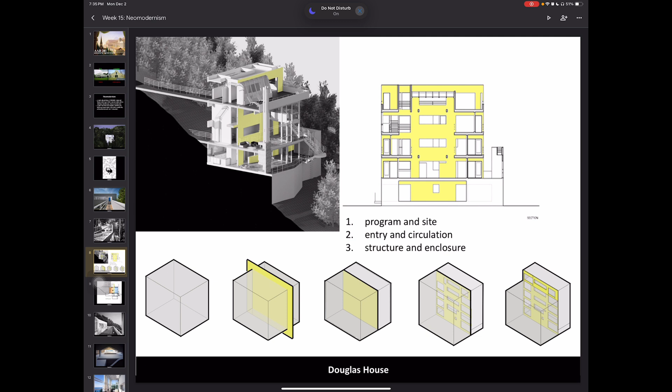So when you look at it in section, this is the way it's articulated, right? You have the private zone in orange looking to the hill, so you have nature as a sense of enclosure on the backside. Then on top you have a skylight, which creates a light well throughout the entirety of the home, because it's a very tall and deep home. Usually you have sunlight reaching all the way to the bottom. And lastly, we have our public zone, blue, facing the coast.

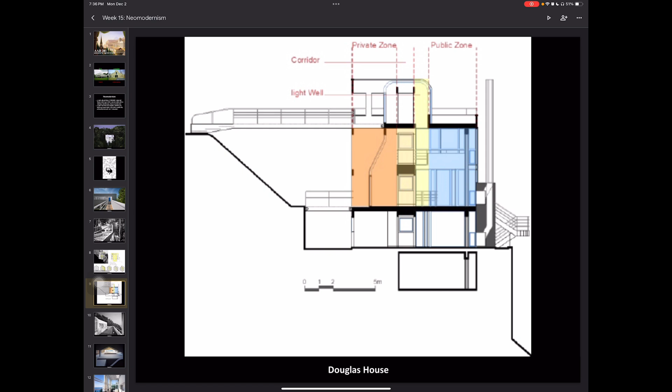Overall very white. He does use a lot of panels on this, and then eventually in his public architecture he uses these panels of metal, which align with everything. So if you go to the Getty Center in LA, which I highly recommend, especially over winter break, it's really nice, you'll notice that every single line aligns to something else. You won't find anything that doesn't align to the rest of the building. It's really incredible, you try to find something and you just can't.

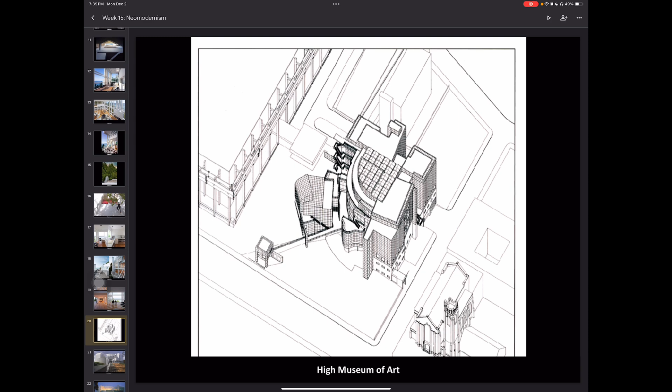So in this one, we can see the element of circulation is the most prominent part. You enter right here onto the second floor, and then you can go into the basement on this level, but really you're going to enter on this upper floor. Notice that he does frame that for us, which is a very classic Richard Meier type of language.

He likes to frame and create portals, so he directs our views where he wants them. If you go out to the Getty, you'll notice he has these frames, and if you go to the rooftop, he kind of frames this is LA, this is the ocean, this is some other landmark, so he pays attention to the site to frame it for us. And the entrance, he does frame it. I forget exactly the thought process, but notice that it's not just straight out onto the street or balcony, but it is kind of at an angle.

Basically, the museum is a composition of different squares. Some people say it's 5, other people say it's 6. So 1, 2, 3, 4, 5, and then the 6th one is over here, which is the auditorium. The auditorium is separated from the rest of the museum so that you can use it independently, mark it as its own thing, and separate it acoustically from the rest of the museum. So functionally, it does work to separate.

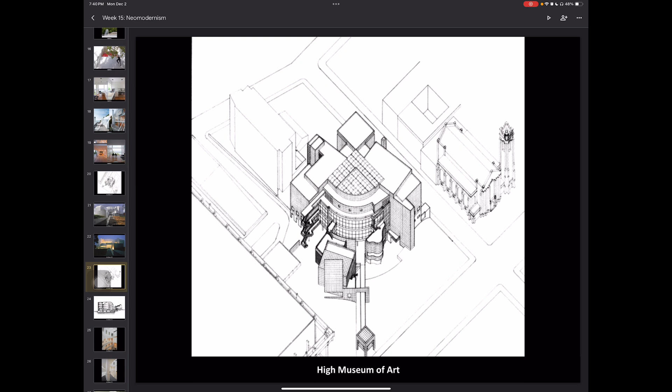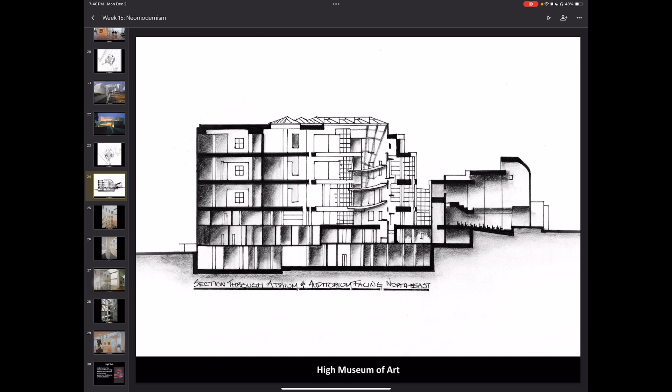Here's what it looks like in section. That big round rotunda section is a huge skylight, just like the Douglas house, and all of that you see inside is a series of ramps. The circulation, you'll notice, he marks with the same style of railing used in the Douglas house, except now it doesn't have that same ship-like look.

It's simply a nice clean railing. So it shows us just how meticulous the Douglas house was in comparison. Yes, it does have that precedent, it's not super obvious, but when you look at it in comparison to this, you can begin to see it was a little bit different, inspired by a different concept.

So you basically meander throughout this ramp, you go up onto one level, and then it takes you back up and takes you to a different level. I'm going to show you a walkthrough so you get a couple of different glimpses of what the museum does.

If we go into the museum, he very cleverly uses skylights, glass blocks, and different materials to allow the maximum amount of daylight with no direct sun rays. You never want direct sun in the museum because it ruins the artwork. You always want diffused daylight.

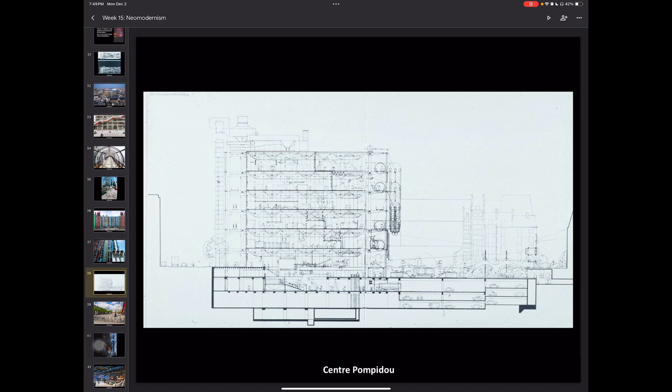By using half of it, they did have to go a little bit more vertical. Now, because this is so large, you are going to have a lot of exhaust and fumes. Since the parking runs underneath all of this, all of those white pieces are the ones ventilating that underground space. Back in this image, that is what these are, ventilating it from the other side of the site.

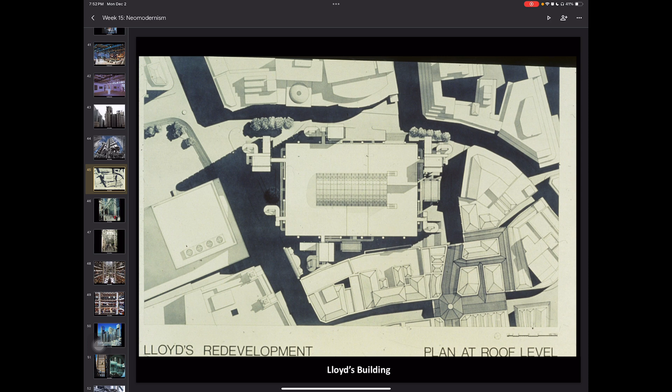From the top, this is the entirety of the building, and notice the circulation is taken out so that it makes those really interesting pieces as we look at it in front of the facade. They could have easily put the circulation inside that big square and left it as a clean outdoor facade, but instead they extract it so you can see how the circulation works in the building, and they do the exact same thing with the elevators. As you enter the building, very similar to the Pompidou Center, you have this huge glass canopy that kind of invites you in.

It also creates a sense of scale. One of the big problems with a lot of early skyscrapers is that they don't give you a canopy like this, which is why, if you've seen any film or been to New York, you'll notice the big residential towers have this red tube with a carpet coming out to the street. That gives you a sense of scale that's more comfortable than straight up entering a 108-floor building all the way up and down.

So in this building, it is integrated because they recognized they were going to have that problem. It's a little bit more friendly and not as imposing on you.

There's also a certain problem with the sense of looming. This happens especially with people that have conditions like schizophrenia and Alzheimer's. If your building is too vertical, it can almost create a sense of it falling over you, and it typically scares people. So you have to create something like this and open it up a bit more so you don't feel as threatened by the largeness of the building as you enter it.

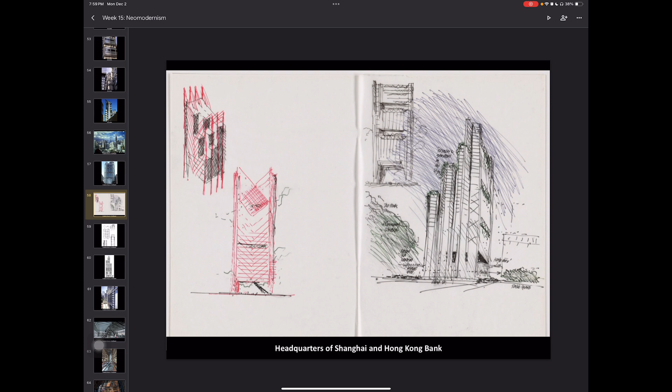So its concept is these four masts on each side, and notice that they have these lines, almost like bridges—these cables that are holding up the building and hoisting it on either side. The trusses and the whole structural system are really meant to just hold up the floors vertically, so that there are these little plates you can slot into place. You're not necessarily holding them up with individual columns at each level—you're holding them up with a larger exoskeleton.

More sections of it. One of the critiques of a lot of these types of buildings is that they have really deep floor plates, and because they try to articulate each floor and repeat this so much, their floor plates do tend to be a little bit lower and not have as much daylight. So that is one of the critiques of this movement.

You can see a little bit more of that skeleton, and it almost begins to have a human-like quality, where it looks like a spine going up and down.

Now, one of the coolest parts of this building is that it is completely open on the ground floor. So this is all you have on the ground—you might have a little bit of an elevator over there for accessibility, but you really just have these two big escalators bringing you up into this glass canopy, which is highly unusual for a skyscraper. Usually you have a whole lobby that comes down with a stair and a really nice entryway, but in this case, you're simply brought up by an escalator.

So it's another kind of manifestation of the high tech—you're brought up by a machine into the building. As you stand in this atrium, you can look back down on that ground level because it's all made of glass, and you can see people move throughout it every single day. Here is that escalator coming up right through the glass.

If you're wondering about thermal control, basically you have an air curtain where you see this here. You know when you walk into Walmart and you feel the air coming down on you as you open the sliding doors—that's basically the same thing that happens right here. That way, the conditioned air doesn't leave the place as quickly.

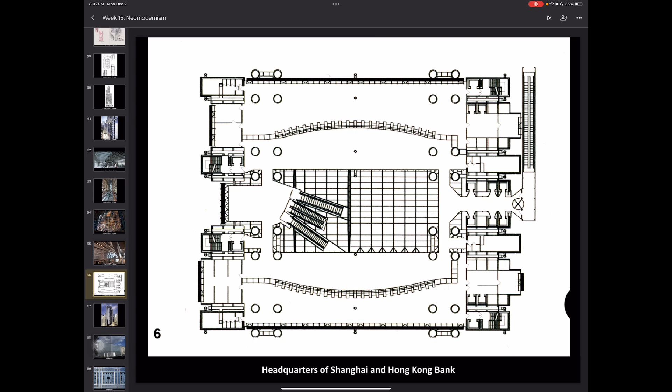The issue with them is because they are so tiny and meticulous, they often have issues with some of them just staying permanently closed or open, so they require a lot of maintenance.

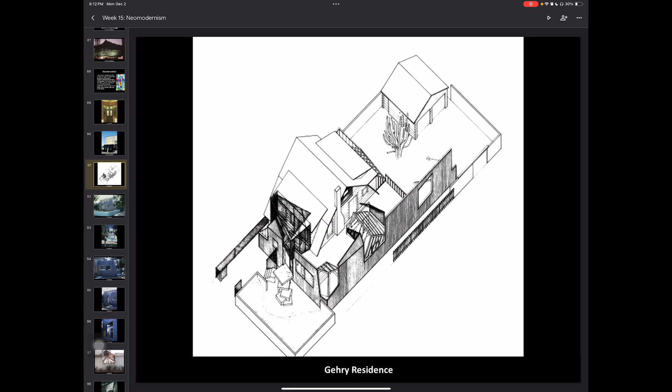What we can see is chain link fence at the top, a little bit of corrugated metal along the bottom. His door is just a sheet of plywood. It's highly unfinished, not really to the taste of everyone. Personally, I don't like it, at least how it looks on the outside, but the ideas are there.

He's basically saying, what if we break away from the idea of what architecture has to be? We use materials that are meant to look unfinished, put them at really interesting angles, and create a shell where you don't even know—is that the interior, is that the exterior, is that a veranda, is that a kitchen.

This is actually his kitchen, which he literally pushed out of his house. He created it into this glass box, and the whole concept behind this was, you have a chain link house, a metal house, and a plywood house, and you drop them on top of this existing house—they're going to fall apart, which is why they kind of look like cubes, but then the corners are cut off, sliced at their angles.

This is the entry. Rather than having normal steps, he creates this really interesting cube composition. And then there's his ugly door.

Here's an example of where that skin leads to an outdoor space, but in his kitchen, it leads to an indoor space, which you can see right there. So what if we create a cube as a ceiling rather than just leaving it flat?

He's not so much playing with the idea of site here—this is simply like a side project he has. As he's acting as an architect and trying to convince clients to do things like this, he's experimenting in his own home to get his technique effective. So this is what the interior of the kitchen looks like with that cube overhead.

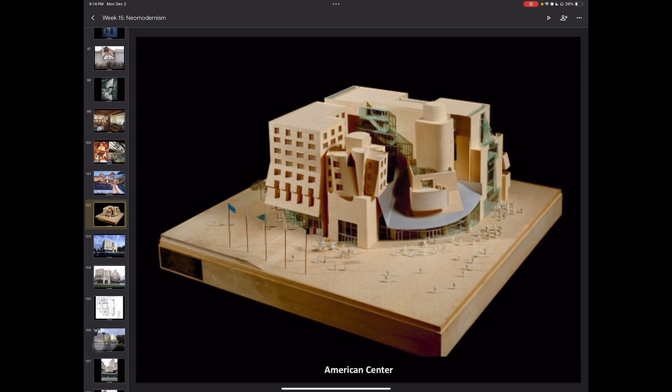All right, so now we're going to look at some of his actual buildings, not his personal projects. As you can see, they still have a little bit of Frank Gehry in them. This is one of his earlier ones.

What he's doing here is allowing this corner on the main street to have a traditional-ish facade with straight up and down French windows. But he's playing with the bottom skirt, allowing it to project a bit without making an exclusion. He's playing with the idea of a traditional alleyway or walkway having a cover over it. Rather than just putting a cover or projection over it, he has the building itself splayed out, so as you walk underneath it's nice and covered, creating a sense of entrance into those shops.

The American Center is supposed to be a place where people from the U.S., expats, can go and enjoy a night of theater, galleries, basically enjoy being American outside of the United States. Notice how that celebrates the entrance, giving you a sense of enjoying being there.

On the back side, where we don't have a major theater street, we have this interesting more sensitive arrangement, so they keep it on the back side so it's not super apparent. There's a lobby, a theater, galleries, auditoriums.

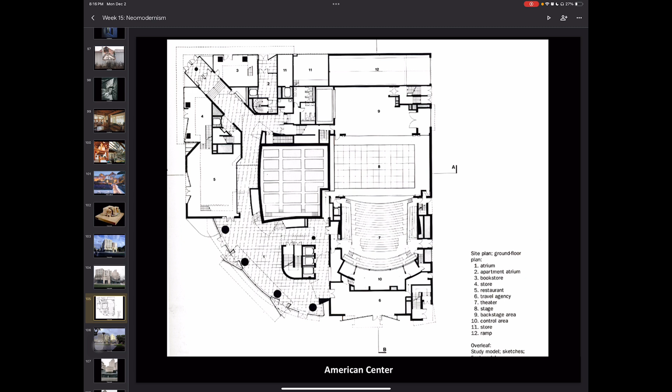Notice that the entrance over on the normal looking corner brings you in at an angle. He's not making it straight and orthogonal where it could just come in from the street, but putting emphasis on the fact that it's a commercial corner. He understands that most people will approach the site like this, and that's a much more natural entry than walking on a sidewalk, turning 90 degrees, and entering a building. You always want to enter as gradually as possible, and he celebrates that in his plan.

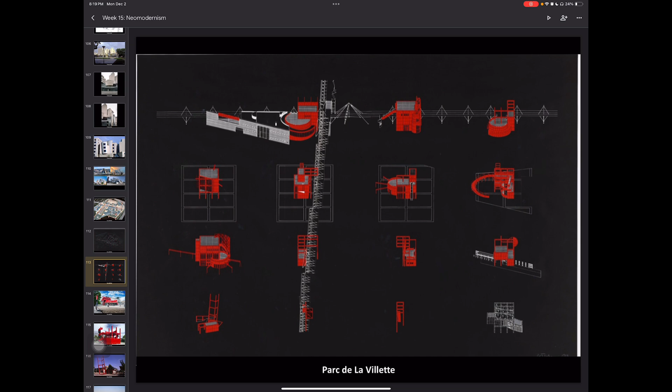This one is made from the idea of points, lines, and planes. The points are all the red elements, which form a local park. The lines are our walkways, and the planes are everything in between. The concept is that you're in this huge, expansive park, much like the English stroll garden, but at the same time you have a sense of place because each of these, what we'd call follies, are individual pieces. As you go through it, you have a sense of wayfinding. Some are interactive, some are playgrounds.

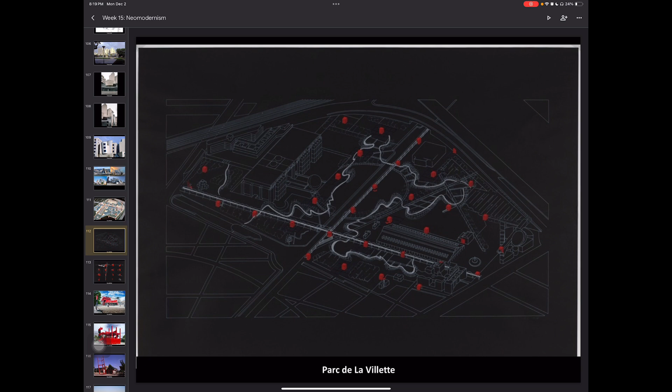You can see it a little bit better. So these are some of the paths that they see inside of here, and I'll show you that sense of place within the lines in a second. So this is a partie of what the Parc de la Villette is, and we have all of these little follies every so often along the regulated grid.

So on the one hand, Tschumi is putting a grid over the site. On the other hand, he's responding to the lines that are already there. So this is an old subway line, and this is an old canal line, and this is an old subway line that are not actually there anymore, but he's making a callback to the point of the 1880s or so, where they did used to have railroads running here.

So he's allowing Parisians to connect with the history of Paris in a way that's very modernist, which the Parisians actually liked. Because remember, the thing that they don't like about all these new types of buildings is that they feel like the history is being erased or suppressed. So by celebrating what was there at some point, they're actually quite happy with this park.

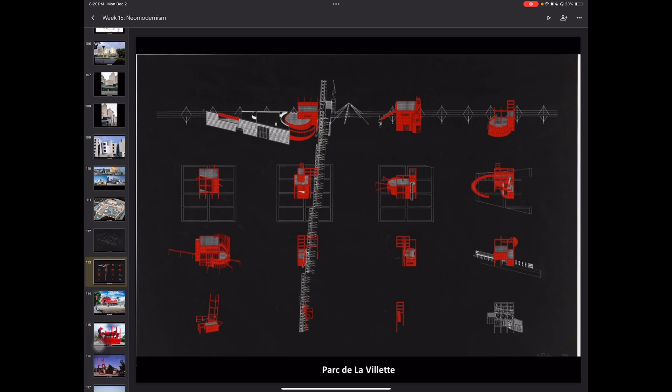These are some examples of their follies. So this one is an information booth. Some of them are little playgrounds, both for children.

And then we have that old subway slash railroad line coming in right here. Right? So that one doesn't actually exist anymore. It's just a covered walkway running along here. And where they intersect, notice that we have a folly in the center as well. So every time we have an intersection of this grid, we do have one of these. They are located every so often, so you do have something interesting to do at every point in the park.

Alright, so here's the review of it. We have 1, 2, 3, 4 down the line, and then we have some going in this way as well.

Because it is a bit of a stroll garden, you do sometimes walk through the follies, under the follies, around the follies. Sometimes there is no walkway, so you have to walk across the plane, which is the big one, into the folly.

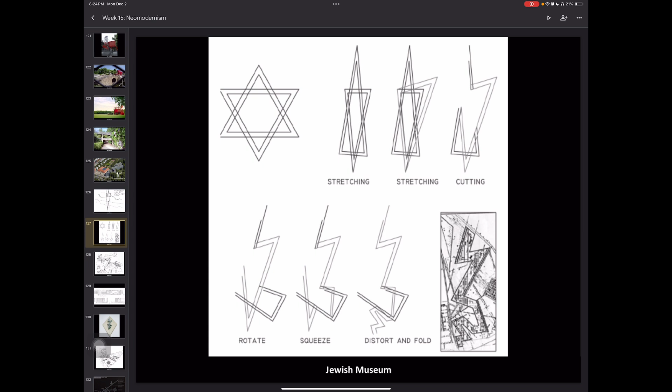He also believes that this kind of lightning-shaped border doesn't really have a direct orientation to it. It is very akin to the experience of being Jewish in Germany for the entire history of the country, where you don't really know what direction the general attitude towards Jews is going to be. So you have to kind of navigate around it depending on what the culture or the climate is at the time. And then he does create what he calls a sense of void within the museum as well.

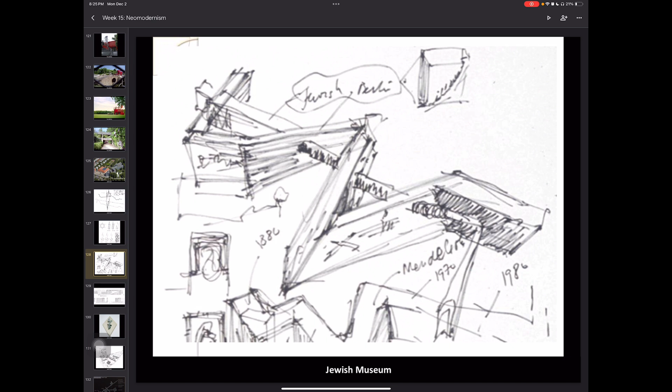So the physical museum is, of course, the lightning or the zigzag, and then if you notice, he does have this big line running through it all the way down. That is what he calls a sense of void and emptiness that runs through the museum. It's not an actual building or physical component, it's simply an empty swath that runs throughout all of it. And it's supposed to be a reference to the emptiness that was left after the Second World War.

So the way that you enter it, and one of the big reasons why he won, because this was also a competition, is you have the original museum, which is a Baroque kind of German palace or institution. You come down through the basement level, and that's when you get into the actual Jewish museum. So rather than coming in at ground level, you have to come down into the darkest portions to then emerge back into

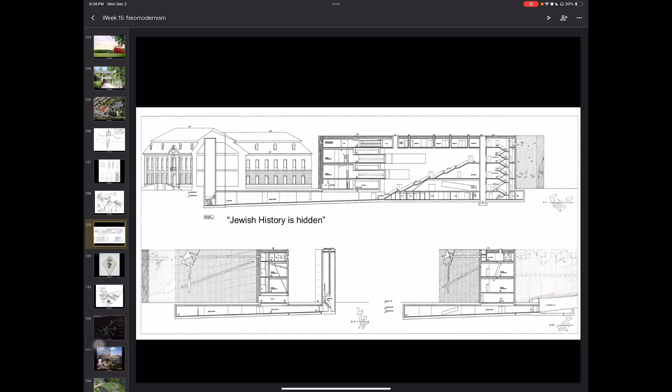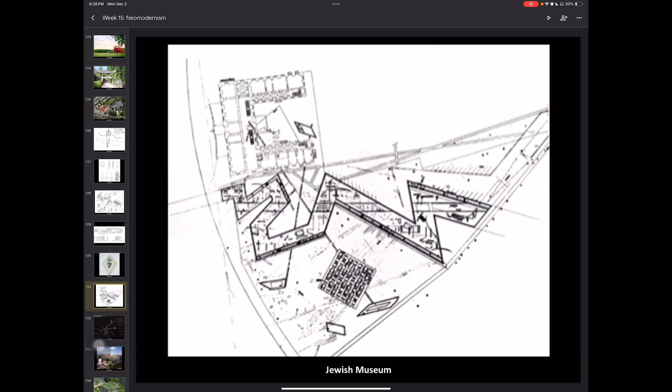a set of options of what you want to do. So you have the Holocaust Tower, which is right here. So you have this axis along here. And notice that it just kind of ends there. It doesn't really go on infinitely, which is again a symbol of the fact that a lot of things ended during the Second World War.

We have the Garden of Exile going down this way, which is also really cool, I'll show you in a second. And then we have our line of continuity, which has a set of stairs that lead you into the upper zigzags of the museum. The line of continuity is supposed to be the actual exhibits where you have all of the different pieces of Jewish art that tell the history of the Jewish community.

So that underground piece, you'll notice that this part of the building kind of points over here. So this is the Holocaust Tower right there, which is this huge piece of concrete, and it does have, if you notice this little line, a slit of glass where daylight can come in. Over here we do have exile, right here, and then you enter the Garden of Exile. So we're going to be looking at that one first.

At first glance, it does look like just a square with different square pillars inside of it. But once you get closer, you'll notice that the interior of that cube is rotating and tilted, and the foundation of that entire thing is really skewed. The experience hidden here is supposed to be symbolic of how people felt during the Second World War being Jewish. It was disorienting, you didn't know where to go, and you did feel highly isolated.